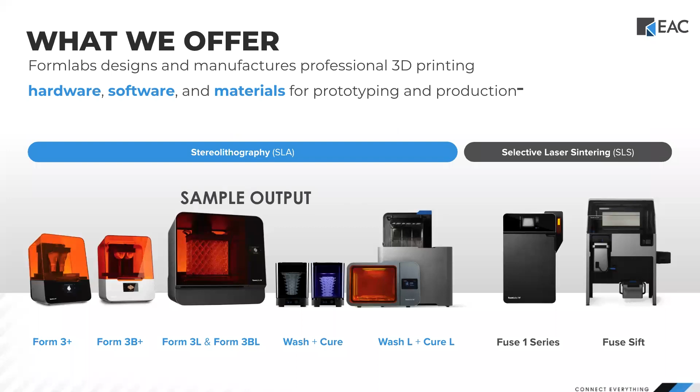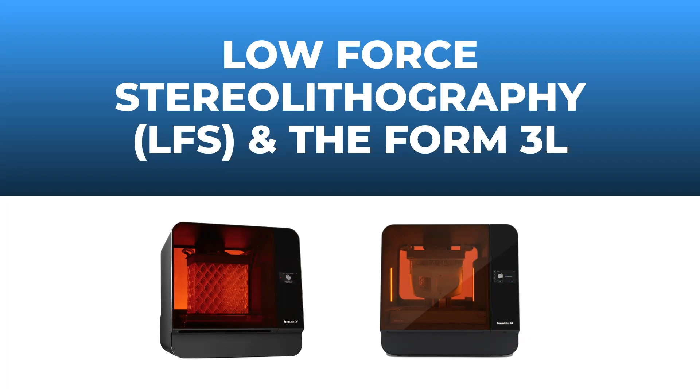So just want to give you a quick snapshot of who we are, what we're about. Really what we're talking about today is what makes this technology so powerful: Low Force Stereolithography, LFS. That's really the key driver to our large format SLA printer, which we'll definitely dig into.

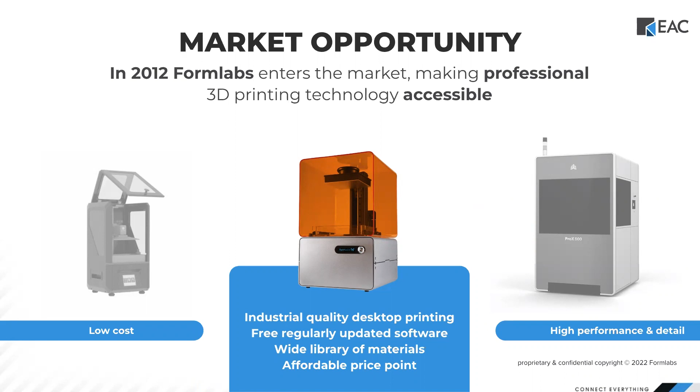Just a quick snapshot on where we wanted to fit and what we saw in the market. We wanted to be an affordable, reliable desktop solution. You can take a look at what's out there on the market, from things you see on Amazon to maybe some of the more industrial machines with 3D Systems or Stratasys. We want to sit somewhere in between - we want to give this technology to as many people as we possibly could, as opposed to only the ones that could afford a very capital expensive product.

And just a quick snapshot of our history - we've been in the SLA and SLS game since 2012.

Starting way back in our Kickstarter days with the Form 1, which we launched on Kickstarter in 2012, we really started to gain momentum with our Form 2, our third iteration of our SLA desktop solution. In 2019, we launched the Form 3 and 3L, powered by low force stereolithography. And then, of course, the Form 3B and the 3 and 3B Plus in 2022. So we've been around for a little while now, roughly 10 years.

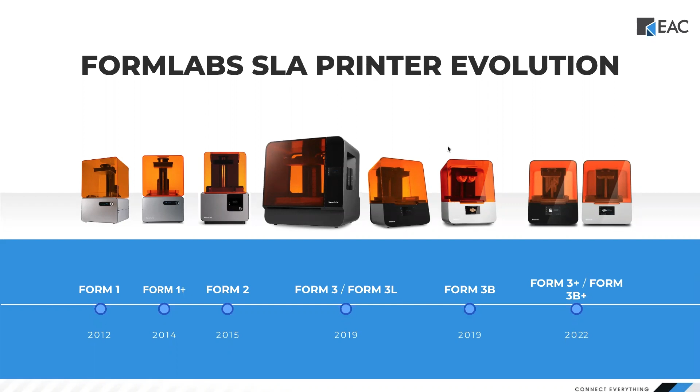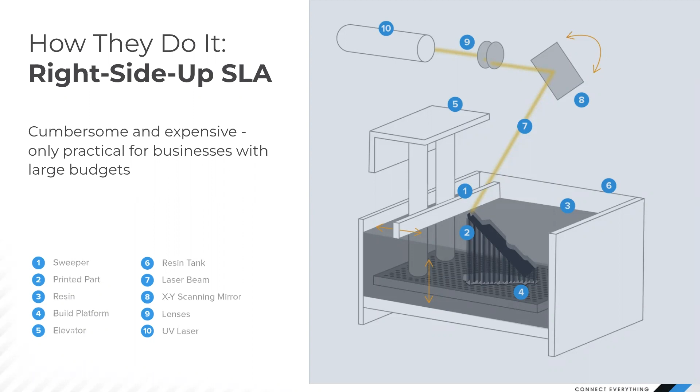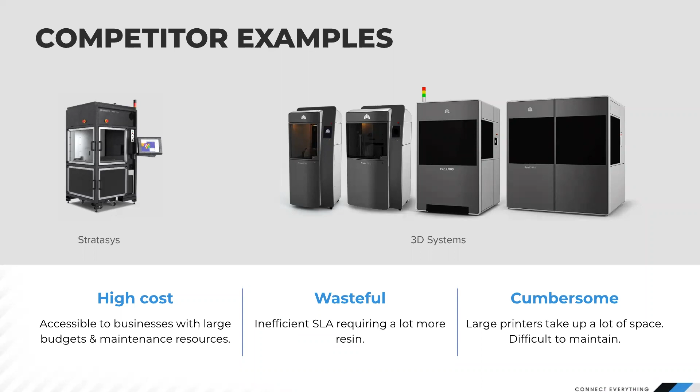We're really excited about some of the technology we bring to the table, specifically LFS, which we'll talk about as we go through today. But our traditional printers were inverted SLA machines. Traditionally, it was a right-side-up SLA, where the print bed goes down as you build layer by layer. You used to expend a lot of consumables, a lot of materials, and it was a very capital expensive endeavor—you used to put maybe $30,000 of materials in that vat. So that's why we chose to do inverted SLA. It tends to be less cumbersome, less wasteful, and that's the route we took. We build our parts from the bottom up, and it's very affordable—you're not using as much material, and it allows us to keep a compact and affordable solution on your desktop.

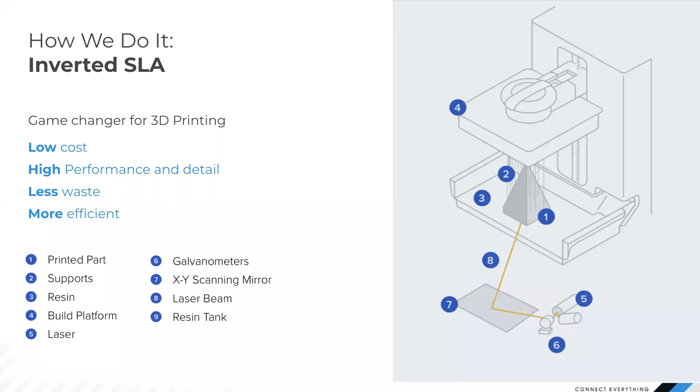So the next evolution we went through is low force stereolithography, which was a complete shift from our traditional technology, from the Form 1 all the way to the Form 2. LFS printing uses a flexible tank and linear illumination to turn liquid resin into the parts you're looking to get accomplished. This is so important because one of the big detractors from inverted SLA is peel force—there's a lot of peel force layer by layer when you're building up as opposed to building down. LFS eliminates that roughly tenfold; the peel force goes from X to 10X less than it was with inverted SLA.

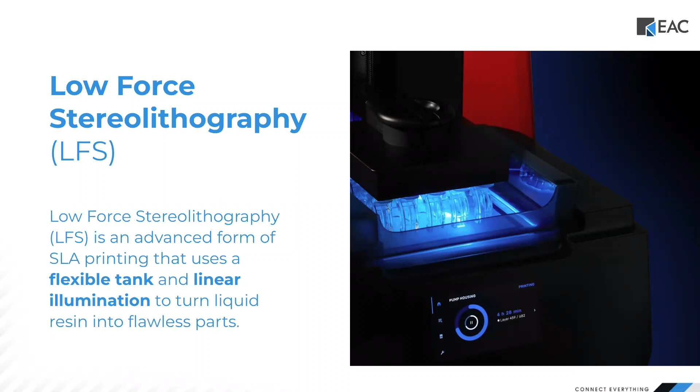There's a couple of great things that brings to the table. First, of course, you have more accurate parts. The parts are more optically clear if you're looking for something for optics testing. I think one of the best factors is that it allows you to build larger—it was really hard to achieve a successful part on our traditional inverted SLA technology. We had to shift to LFS to build bigger, and that's when we launched the LFS solution.

We'll get into the Form 3L as we go through today, but just a couple things to keep in mind: we have a wide range of materials in our library, a very versatile list. I think we're up to roughly 35, broken down into 6 categories, including our SLS materials and our nylon resins. That's what you have on the screen there—just a snapshot of the versatility of this machine.

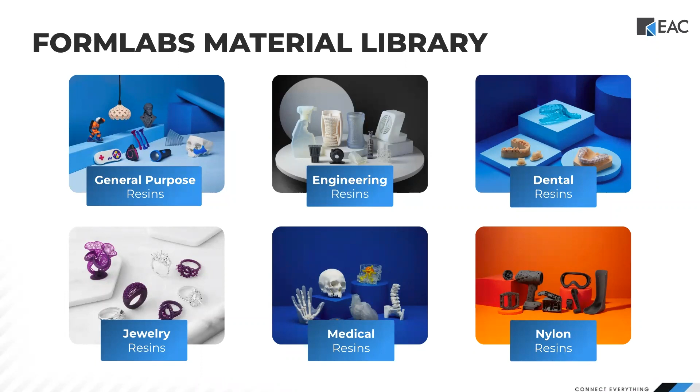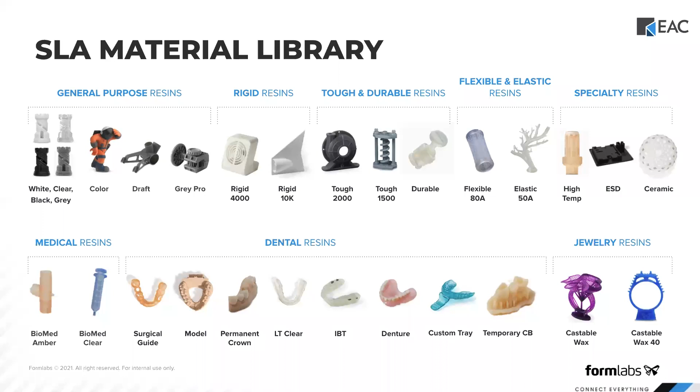And the range of applications runs the gamut, from our general purpose resins to our specialty resins. Our tough and durable resins are becoming more and more popular. Our rigid resins are really starting to take off—those are glass-filled SLA materials. And then, of course, we have our flexible or elastic resins, very good for engineering applications, but also really starting to take off in the medical space as well.

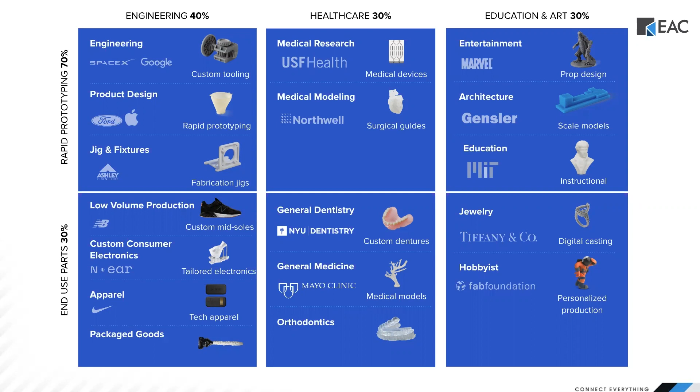So we'll go ahead and talk about some of the applications and user stories that we have. Just to give you a rough idea of how we break down on a vertical basis, there are two groups people fall into: the majority, who usually just use our tool to prototype—that's on the top left—and on the bottom left, end-use parts. Those are the two buckets people fall into. 40% of it is focused on engineering, 30% is in healthcare, 30% is in education, with a range of applications there. The first application I want to talk about is rapid prototyping—this is really our bread and butter.

A lot of folks are looking to bring this type of technology in-house to control two things: the cost associated with outsourcing, and the amount of time it takes to turn around sample parts. They want to bring this in-house for that specific reason.

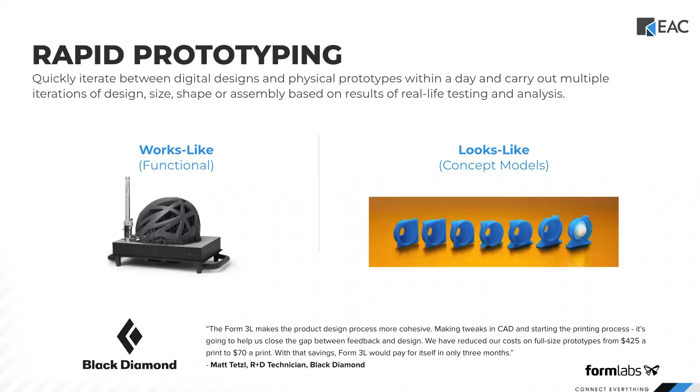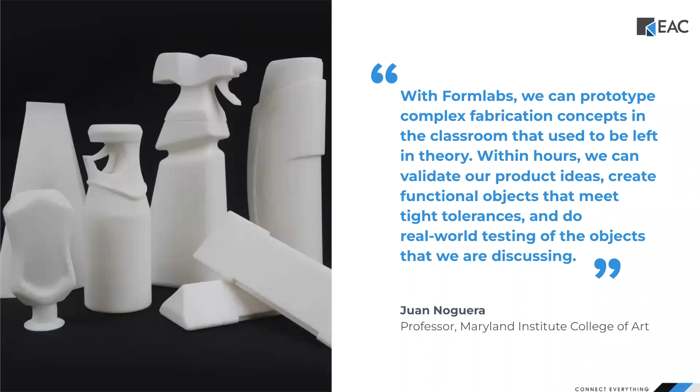We also have an example from Maryland Institute College of Art. They're really looking to bring the digital workflow into the classroom, especially at the university level. What people really appreciate in universities is the versatility of this machine. If you want to spend a day talking about rigid glass filled materials and what applications apply, that's not a problem. If you want to go into the elastics, the flexible resins, you absolutely can teach purely around that. Or you can take it a step further and just talk about how you're going to introduce the digital workflow, maybe just talk about prototyping. There's a range of applications, a tremendous amount of versatility, and it really opens up the curriculum in terms of how they teach around that digital workflow.

Manufacturing aids tend to be another bread and butter application for Formlabs, and there's another benefit to using a large format Form 3L in this solution — you're able to build at volume. You can take a look at the jigs and fixtures, that center picture, and the amount of builds you'd have to do on one of our desktop solutions, the Form 3 versus the 3L. The Form 3L has a build volume that's about a 5-fold increase, give or take. So if you have small jigs and fixtures, you're absolutely able to get that accomplished. Customized tooling is a big application too.

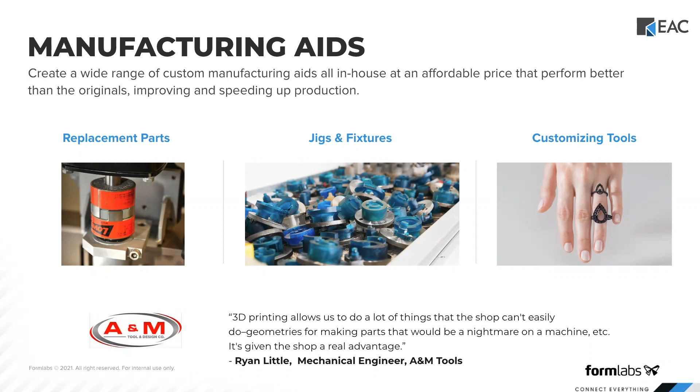Replacement parts are really starting to gain some momentum based on what we see with the supply chain and what people are trying to get accomplished. I used to spend a lot of time talking to R&D departments who were just outsourcing their parts. They're looking to really bring that in-house, so a lot of those conversations are shifting to more or less supply chain problems — how do we change the dynamic of the supply chain problem that we have? 3D printing is really starting to take off with regards to replacement parts.

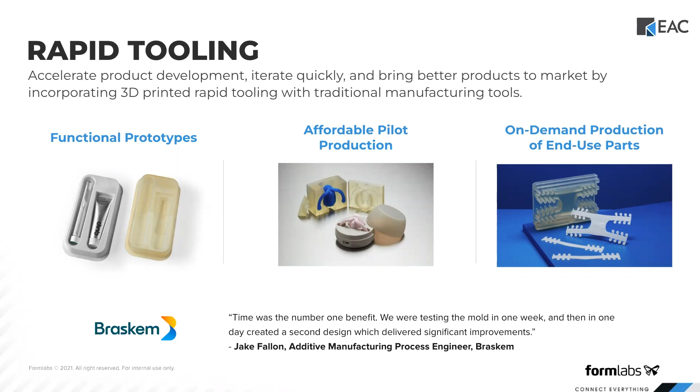Compression molding is another example — OXO is another company we work with. They're doing some very intriguing things with regards to molding. What you see in the middle there is an application associated to injection molding, and they're able to do a lot of testing and really iterate rather quickly with regards to some of the molds they built. So the range of applications really runs the gambit.

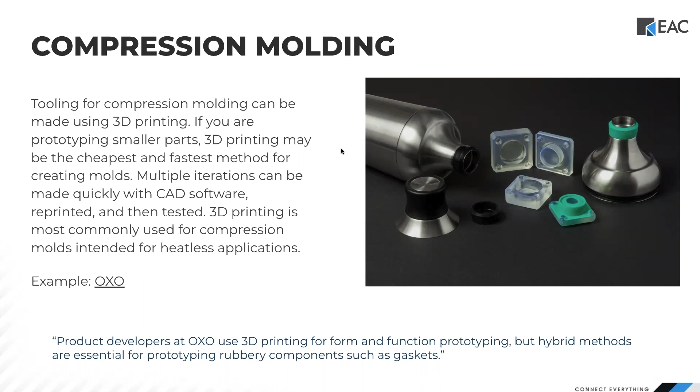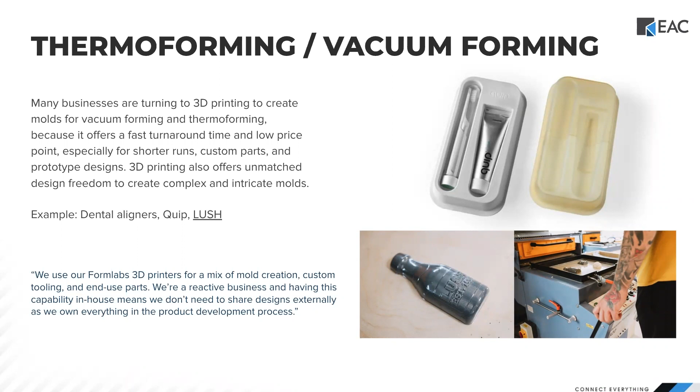And we touched on this a little bit earlier, but thermoforming or vacuum forming applications are starting to take off. You can see the example there from Lush — if you walk into any Lush cosmetic store, they do this in-house, but they build their molds with the Form 3L. Essentially that's the starting block for some of the designs they bring in-house. Quip is another great example there.

And then, of course, the medical space, right? This tends to be about 30% of our business, really starting to take off with regards to surgical planning models. This is very big for the OR. You have a group of surgeons going into a very tricky surgery. Sure, you can show them the scan and they can see it digitally, but surgeons rely very much on their hands. So what they'll do is take that scan and turn it into a 3D print. Maybe it's a tricky tumor removal, a really tricky surgery. They'll group the surgeons together, and they'll put their hands on that 3D model before they go into the OR. We have a series of case studies that showcase the amount of time saved when surgeons have a 3D printed part in their hand before going into the OR. So there's a really strong business case there.

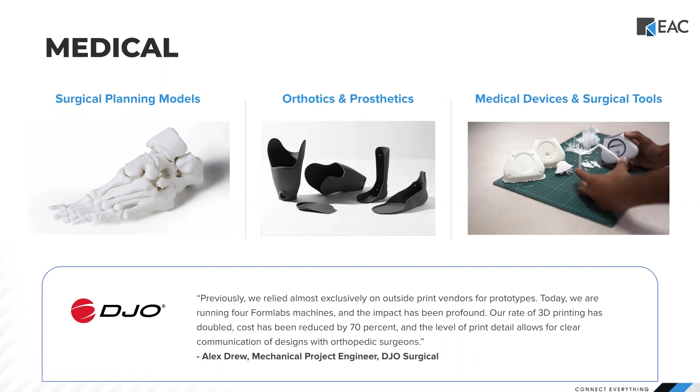And of course, some bread and butter stuff for EAC, medical device and surgical tool prototyping. It's really bread and butter for what we do out there. So the range of applications runs the gambit. And it really just comes down to some of the questions you guys might have.

The Form 3L has been in service since 2019. It's really starting to take off because people want to bring this technology in-house, whether that's supply chain concerns or just the idea of bringing their design sprints and design life cycles to a shorter time frame. 3D printing is really starting to take off, and the digital workflow within those organizations is really starting to be adopted.